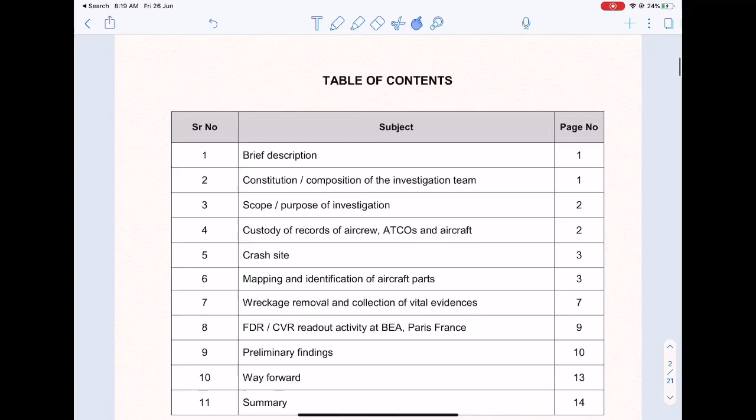What's up everyone, my name is Saurabh Kumar, and today we will be discussing the preliminary investigation report on the Pakistan International Airlines A320 registration AP-BLD air crash. This was a scheduled flight from Lahore International Airport to Karachi on the 22nd of May 2020. This report has been issued by the Pakistan Civil Aviation Authority, and we will be decoding it. I will not go over the entire report, but the key sections and preliminary findings are what we will be discussing.

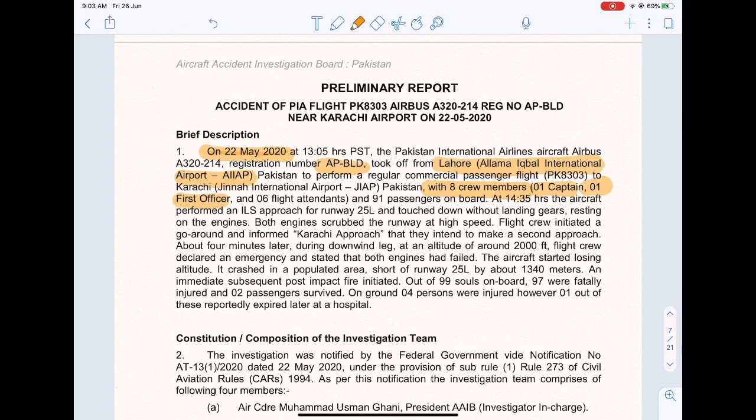This was on 22nd of May 2020, as highlighted here. The flight took off at 13:05 Pakistan Standard Time from Lahore Allama Iqbal International Airport. The registration was AP-BLD. This was a regular flight with 8 crew members on board, 1 captain and 1 first officer. Airbus A320 is a 2 crew cockpit, so you need a minimum of 2 pilots, the captain and the first officer, along with 6 flight attendants and 91 passengers on board.

At 14:35 local time, roughly 1.5 hours after takeoff, the aircraft performed an ILS approach. We will talk about what an ILS approach is later. The runway to land on was runway 25 left. Every runway is given a designator according to the magnetic orientation of the runway, so 25 basically defines 250 degrees from magnetic north. The aircraft touched down without the landing gears.

This is a very interesting part - why did this happen? So far no one has been able to ascertain this, but let's see. Was it because of a system design principle? Was it a malfunction? Was it completely because the pilots were disoriented? We will find this out as we learn and dig deeper into the report.

The plane rested on both the engines, which is evident from the pictures we have seen from the CCTV footage located at Karachi airport. Both the engines actually scrubbed the runway, and there is evidence of that.

Flight crew initiated a go around and informed Karachi approach that they intended to make a second approach, wanting to come back for a second landing. They declared an emergency and stated that both engines had failed, obviously because the engines had been so badly damaged upon being scraped on the runway that afterward there was no chance. There might have been fuel leakage, hydraulic supply failure, or electrical component failure - it was too difficult for the engines to perform at their normal operation.

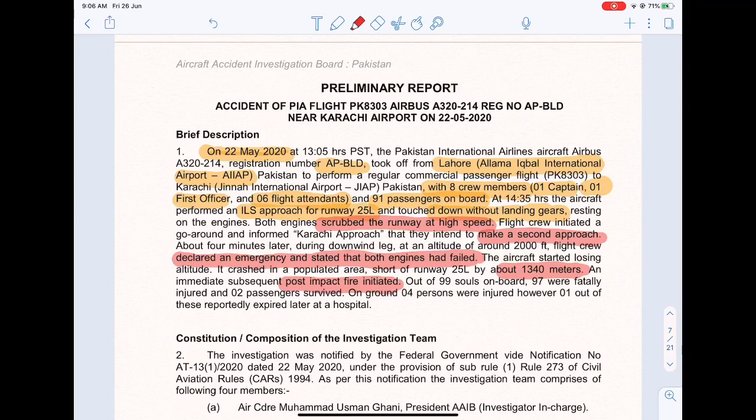Out of 99 souls on board, 97 were fatally injured and only 2 passengers survived. I believe one of the passengers was the chairperson of one of the leading banks in Pakistan. On ground, 4 persons were injured, however 1 out of these reportedly expired later at a hospital.

Alright, so it's unfortunate that this accident occurred. This was a completely avoidable accident. Every accident is avoidable, but accidents are inevitable. I think they will continue to happen, but we have to continue to learn from our mistakes.

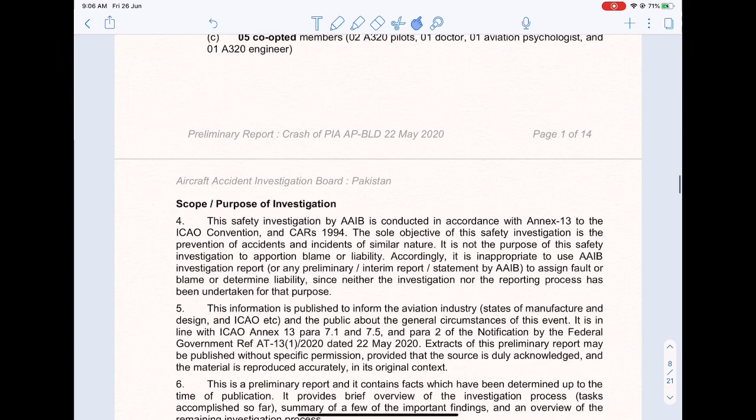This basically shows all the officers and leading investigators involved. I'm not going to delve deep into this, the scope and the purpose of the investigation. Largely it summarizes that the purpose of any investigation is basically to improve the safety of aviation rather than blaming or assigning blame to any particular individual or company.

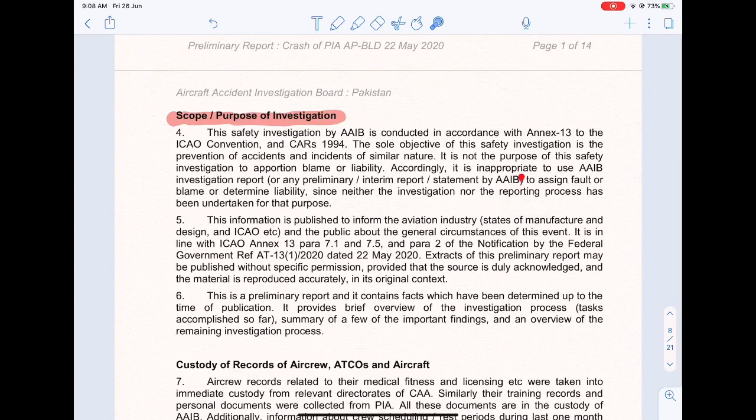Okay, so now let's move forward.

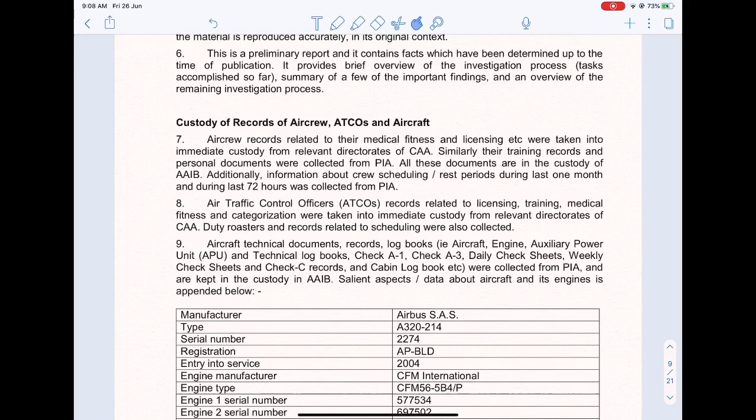Custody of records of aircrew, ATCOs and aircraft. So immediately after the accident, the investigative authorities will take hold of all the documents of the pilots, their schedule, in the past few hours before the flight or days. Were they fatigued? Did they sleep well? What was their rota like? How often had they been flying?

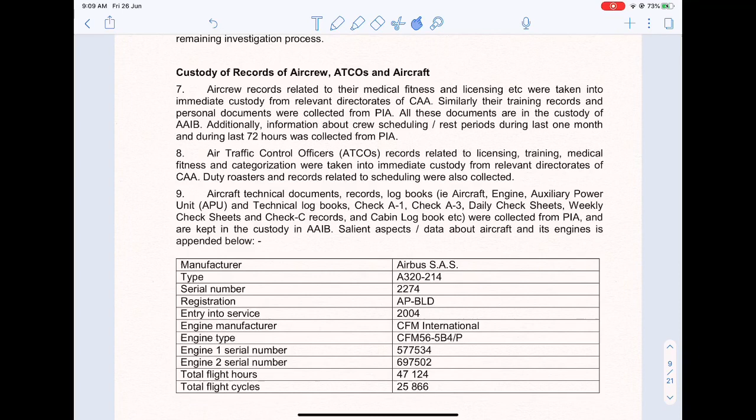They will check the maintenance records. When was the last maintenance done? When were the checks carried out? And interestingly, in this particular case, because the aircraft was grounded for a very long period of time because of COVID, since the Pakistani airspace was closed, even that aspect would be looked into, whether there was a degradation or whether the pilots were proficient enough to carry out their duties.

We call this being 'current.' Pilots have to do 3 takeoffs and 3 landings every 90 days. They have to do various simulator checks on a yearly or half-yearly basis. So even that aspect would be looked into.

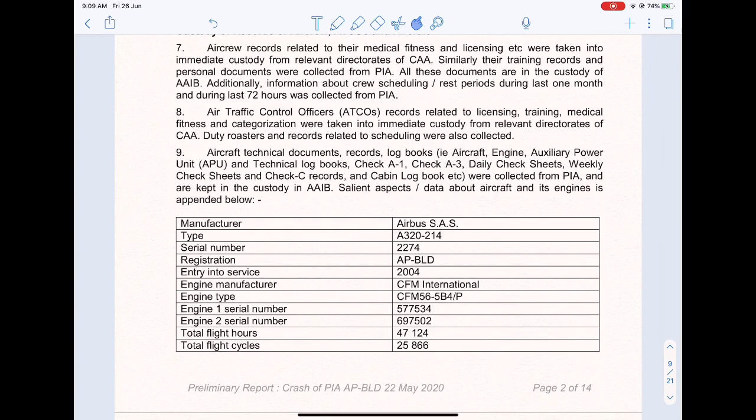This table summarizes the entire description of the airplane. The manufacturer was Airbus S.A.S., a European-based firm. The type of the aircraft, registration, entry into service 2004. So not a very old aircraft, it had been in service for about 16 years or so.

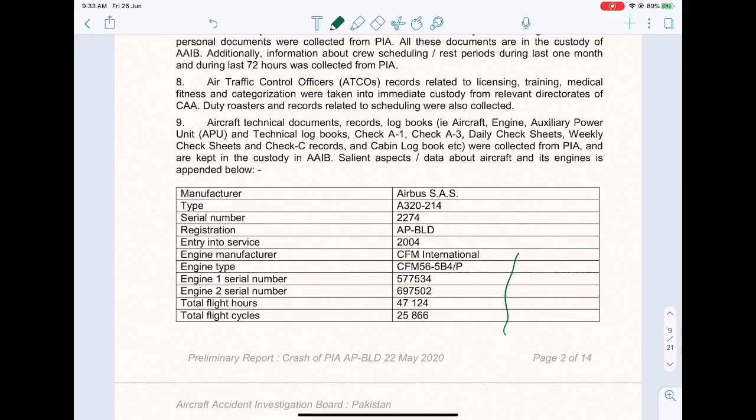Engine serial numbers and total flight hours and total flight cycles. So your flight cycles are your takeoffs and landings, and your flight hours are basically the total number of hours within which the aircraft was actually in operation.

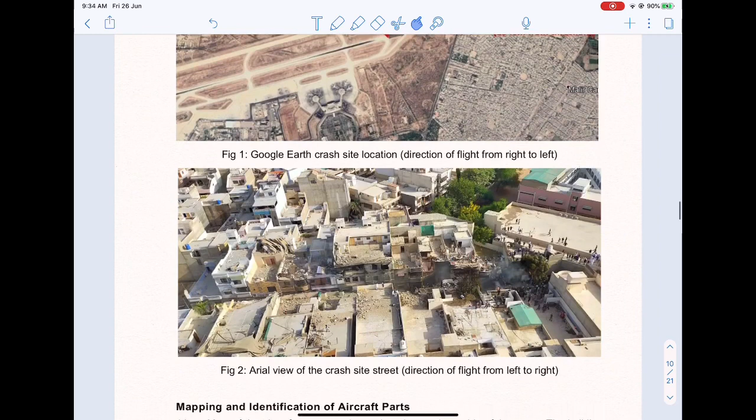Okay, if you can come further down, this is the aerial shot. So the aircraft came straight down here and it crashed in this particular alley over here. Straight, as you can see, there is no damage over here, no damage over here. However, it seems like the aircraft just came in and crashed over here.

I'm actually pretty surprised because the damage is very concentrated in just one alley over here. The destruction has largely been caused to the rooftops of the houses. No building has been completely demolished, and I think one reason for this is largely because the aircraft was coming at such a slow speed because it had stalled. It was just coming down. The speed was, I think, roughly close to about 140 knots or something, which is very close to your landing speed. And so fortunately, at least the damage on the ground was kept to a very minimum.

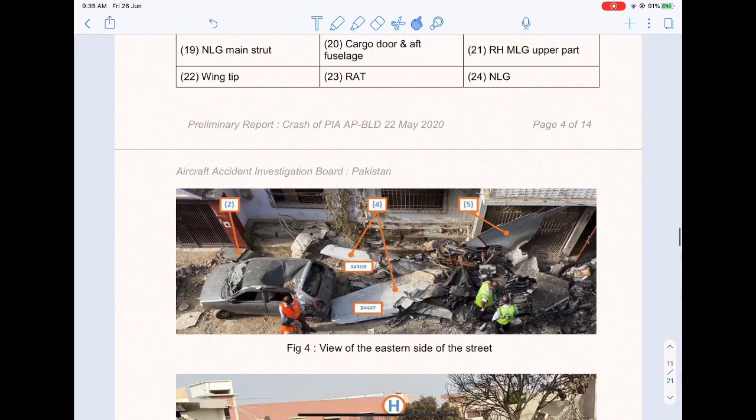For example, over here, I think this is the part of the wing or the stabilizer. This looks like the elevator, and you can see here all the damaged parts have been laid out on the ground.

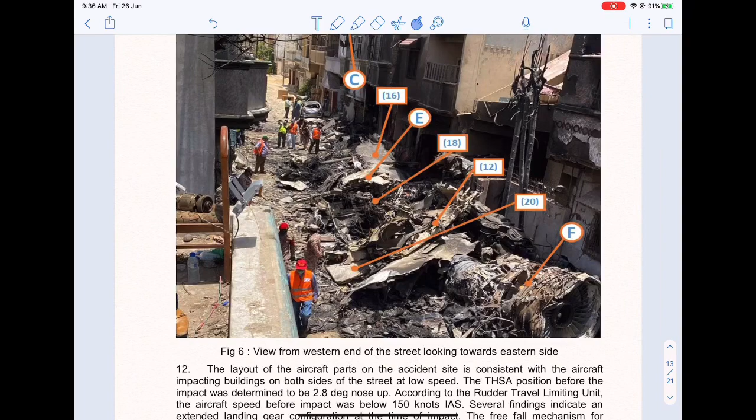So I think this whole structure over here is the fuselage component. I would like to assume this is the engine, could be the right or the left. Over here you have the gear assembly, located just behind the engines. And this seems to be the fuselage structure, the main body of the aircraft. Again, we can see how the entire structure fell in a single straight line, linearly within this alley over here.

And over here as well, we can see looks like one of the motors, probably from the engine, or it could be a part of the tail cone. It's very hard to say. It could be any one of the pumps for hydraulic lines or for the pneumatic air pressure.

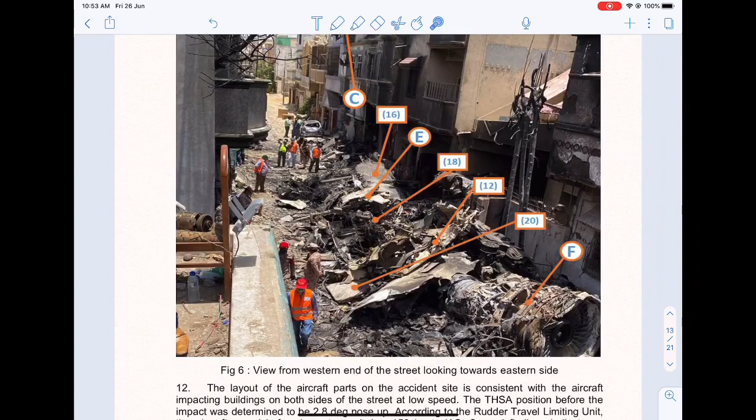So the manufacturer's responsibility is largely to identify these components, because they are the makers of these components, and bring all these components to another remote facility where they can be assembled and a skeleton structure can be prepared. We will see that now in the below pictures.

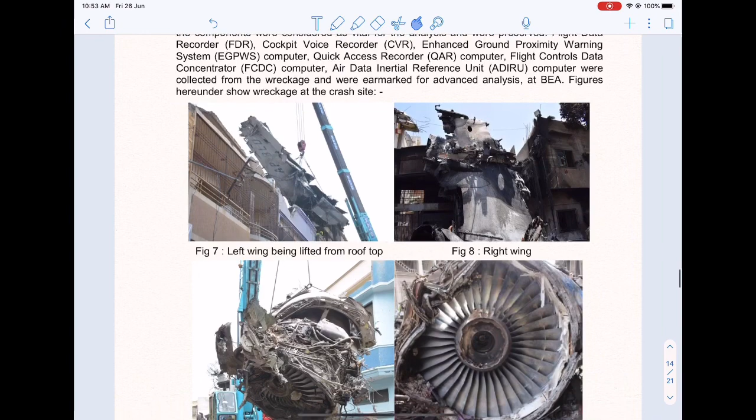So here you can see the scavenging effort. So this is the wing, I think this is the left hand side of the wing. Yes, this is the right hand side of the wing. Here we have the right engine, and this one is the left engine, which is more destroyed than the right one. So probably the left engine had the first impact upon the ground.

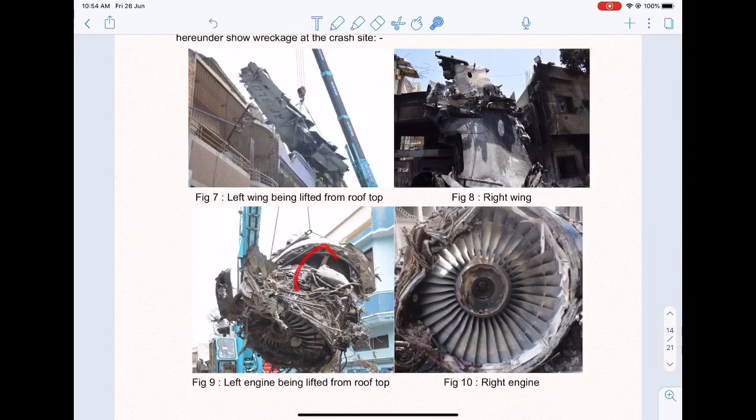This over here, I think this is the Full Authority Digital Engine Control, also called the FADEC. It's mounted on the side of the engine. This basically manages the entire operations of the engine. It's called Full Authority Digital Engine Control.

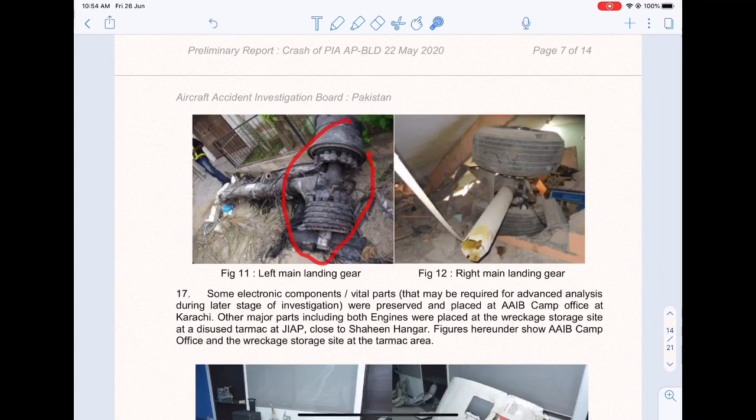Again, we have the bogie of the landing gear, the right as well as the left. Again, you can see the left is completely destroyed. The right is still intact with the tires, but the left one, the wheels, I think the rubber has completely melted or it has come off, but the right is still intact over here.

Some interesting components again we can see over here. This looks like the cowling of the engine. Again, by the curvature, seems like parts of the engine. Some extra components from the avionics, I believe, since I can see a lot of wires over here.

This panel seems to be from the cockpit. Yes, it is from the cockpit. Actually, this is the top-down view in this way. These seem to be the limitations, the SELCAL, this is the standby instrument, and this one is, I think, CPDLC, controller-pilot data link communications. Yes, so this should be actually upright in this way.

This seems to be the panel from the EGPWS, which is Enhanced Ground Proximity Warning System. This basically would have played a very important role because one of the modes or the warnings that it provides is about the landing gear. So if your landing gear is not down by 750 feet above the ground level and you're coming in for a landing, the warnings would chime.

It would state to the pilot, hey buddy, listen, your landing gears are not down, do something about it, you're getting close to the ground. So there are a lot of oral warnings, visual warnings which would have come, and we will hear this in the cockpit voice recording as well, why they ignored it, why the landing gears did not deploy, why they did not come out.

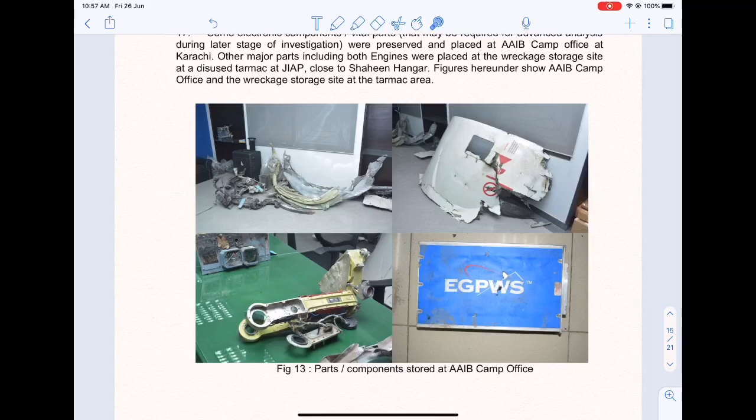Once the landing gear is extended, you can push your speed to 280 knots. But if you want to retract it inwards, the limitation is 220 knots. These are various limitations that pilots are supposed to know by memory, and this is again part of the FCOM.

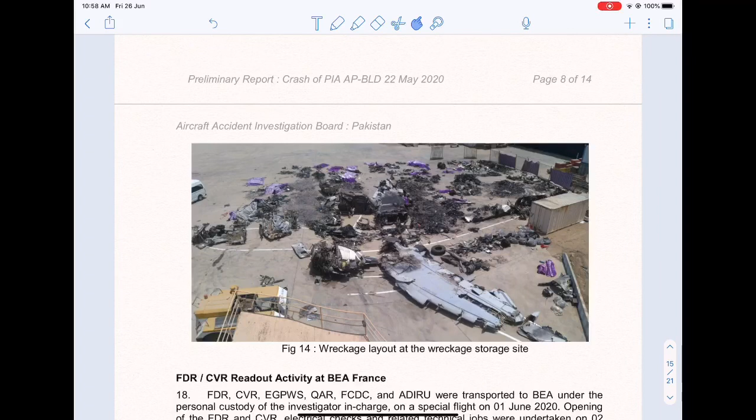As I was talking about, all the parts are scavenged from the crash site and laid out in this remote facility, which could be a hangar or open air facility, just to understand what components have been scavenged, what can be recoverable, and how we can retrieve information from various components. If you will see, this is the left wing. The right wing has not been recovered completely. These are your engine number 2, engine number 1.

This is the cockpit area, and that's the rear of the aircraft. So this is how the aircraft is actually laid out on the ground, and you can see these white markings on the ground, which basically show the dimensions of the Airbus A320. Sorry for that Mickey Mouse drawing.

Now, we all have heard about the ATC pilot communication, which is all over YouTube. However, we don't know what were the internal communications taking place between the pilots, or between them and the cabin crew, and the PA announcements. This would have recorded every voice, from their breathing to their communication with each other. That is essential, and that is what we have learned - that the pilots were actually talking about the coronavirus impact upon their lives and their financial situation, and they were completely distracted.

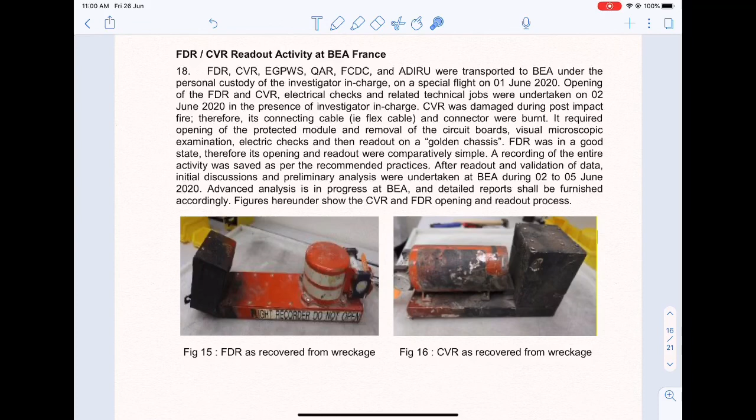The flight data recorder, on your left hand side, would have recorded every single parameter of the flight, as we will see in the next slide. So why the landing gear was not down, or when it was up, what was the flap position, what was the slat position - every parameter would have been recorded by the flight data recorder. This basically helps investigators simulate the environment in which the aircraft was flying at the time of the crash and moments before it.

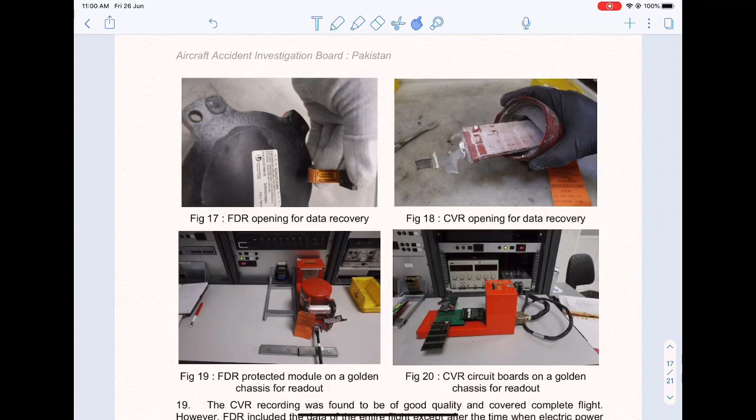Here we can see how they were basically retrieving the data from the flight data recorder and the CVR, and this is very sensitive information. You can see that no major damage was done - this is so robust and structurally integrated that it can basically take a large amount of forces, fire, and water pressure upon it before being completely destroyed.

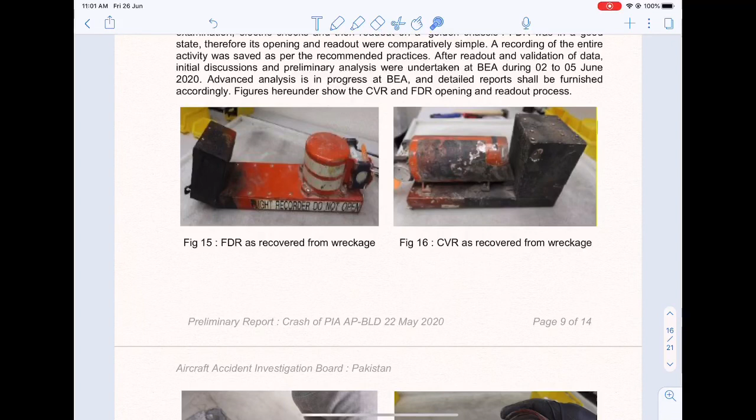Hardly has there been a case where the flight data recorder gets completely destroyed beyond which the information can be retrievable. It's called a black box, but however, you can see it's orange in color so that it is easily distinguishable at the time of retrieving the destroyed components.

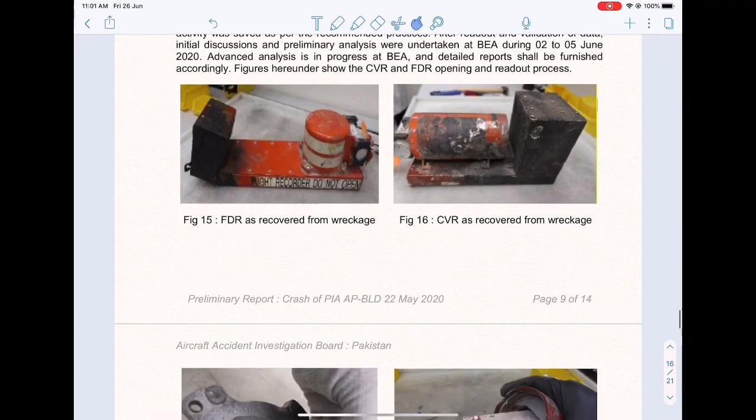So this is what essentially I want to talk about the most, the preliminary findings. We are going to go over each point, and I'm going to help you explain the various terminologies used, along with the actual approach chart for Karachi airport using the Lido charts, which is what pilots essentially use when they have to prepare for the approach briefing.

So let's go over it word by word. The investigation so far into the available evidences, that is the FDR and CVR readouts which we saw above, the preliminary assessment, footages from the CCTV and security cameras at the airport, Karachi approach radar data etc, following has been revealed and validated as the preliminary findings. These accounts are based on the recordings from the data, the CCTV footages, maybe eyewitnesses' accounts, and from the controller reports. The weather at the origin, en route, and at the destination airfields was fit to undertake the flight.

So we did not have any serious weather, so to speak. On the set date, the PIA flight took off from Lahore at 13:05, and the departure from Lahore and cruising flight was uneventful. However, there were no standard operating procedures followed, which is what we are aware of now as the aviation minister announced at the parliament. The crew also did not follow the standard call outs.

So what are these standard call outs? I will take you through. So we use particular phrases.

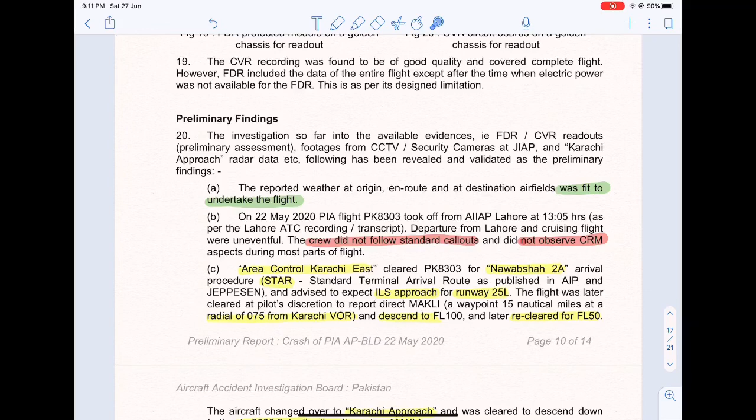And this point is located 15 nautical miles from radial, at radial 075 from Karachi VOR. Okay, so a few technical terms over here. I will have to explain all these. And descend to flight level 100 and later re-cleared for flight level 50.

The aircraft was handed over to Karachi approach. So from Karachi Control East, it went to Karachi approach and was cleared descent to further 3000 feet by the time it reaches Makli. So the workload was increasing continuously. First 10,000, then 5,000, then 3,000, and at their own discretion, which means that pilots had to reach 3000 by the point they were at Makli, and they had to do whatever they could do.

And this is where things happened incorrectly. Everything went haywire in this particular scenario because they came in too high. So let us go back to our drawing board and let's try to understand. But before that, let us open the Karachi chart again. So as I mentioned previously as well, this is basically the Nawabshah 2A arrival.

And they are essentially flying on this route. They're coming like this. Here is the point Makli, and this is the routing that they were supposed to follow. Make a right turn over here. There's another point called Poonam where they were not supposed to report. They were supposed to report at a point called Makli, which is this triangle over here.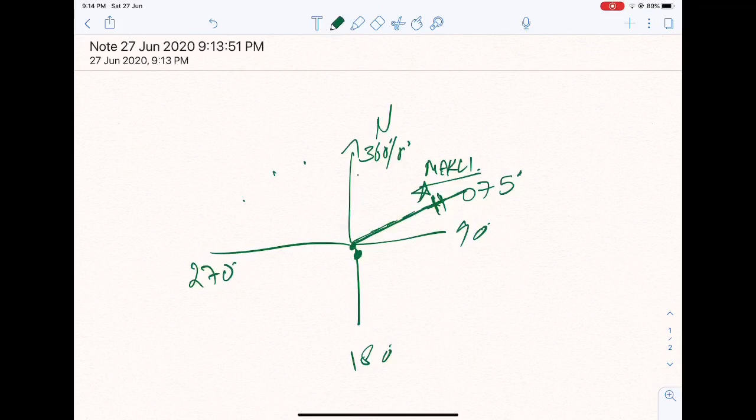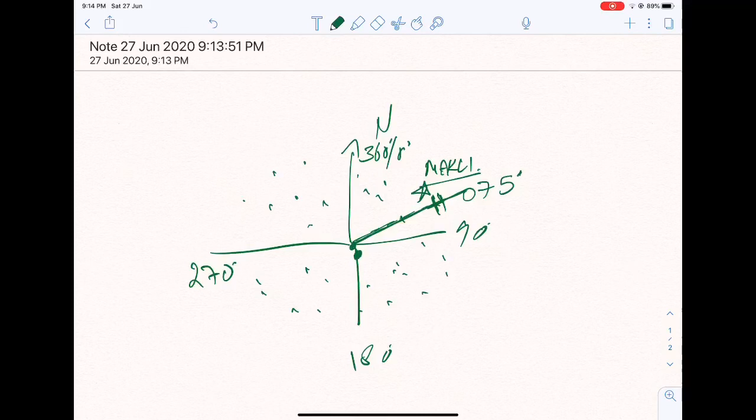And the aircraft would be on this particular radial 075, and the aircraft could be on any point. So it could be wherever it is coming from, but it has to be on a certain radial. Given the aircraft's position and where it was coming from, this was on radial 075, just to keep it simple to understand. So imagine this is like a clock, and we go 360 degrees from 0 to 360.

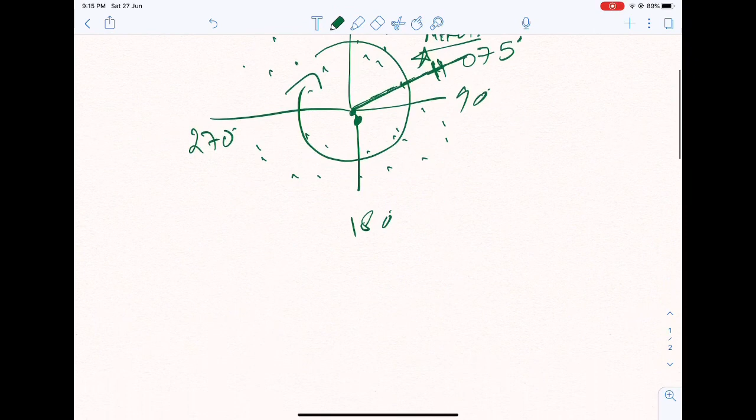Alright, since we are over here, I also want to take the time to explain what an ILS is. Okay, so imagine this is the runway. They said the runway is 25 left. What exactly is 25 left? L basically stands for left or right runway, so there were two runways at Karachi. The aircraft is coming from here - this is 25 right and 25 left. So this was using 25 left.

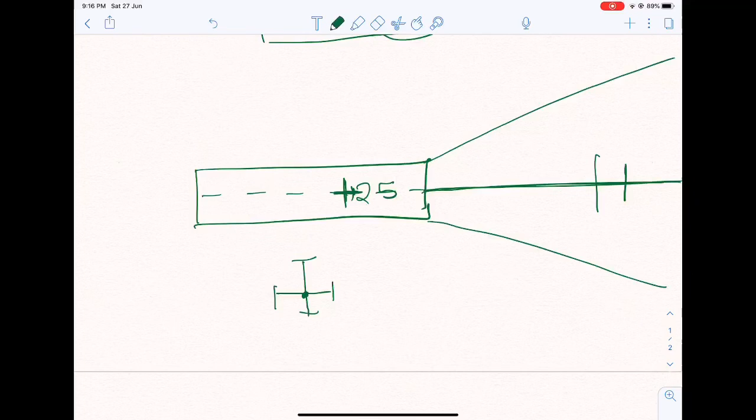Now what is an ILS? I'm not going to go very technical, but basically an ILS is an instrument landing system, and it centers the aircraft to the runway center line. You want the aircraft to land here, on the center line of the runway. There are two beams: one is for lateral guidance, which is your side to side guidance, and one is your vertical guidance. So you want to keep your aircraft exactly on the center. Imagine this is your lateral beam, the center beam. So if the aircraft is coming from here, it will track this particular path, which will be exactly on the center line of the runway.

That's one signal. Now let's look at it from the side point. Let's say this is the surface, where the aircraft will land. Now this is your vertical profile - and if I'm trying to make it a bit 3D, this will be your lateral profile, the center line of the runway. But here I'm concerned about the vertical profile. Sorry, that drawing is confusing - let's just keep this as the runway and this as your vertical profile. Usually this is at 3 degrees. The aircraft will follow this path vertically as it comes down. It can't be too high, because then the aircraft will land in the middle of the runway - it will eat up too much runway. It can't be low, because then it will land short of the runway. It has to be exactly on the glide path, so this we call the glide path.

So an ILS has got two signals. One is called a LOC, or localizer, and the second is called glide slope. The localizer is for your lateral guidance, and the glide slope is for your vertical guidance. You just need to know that for now.

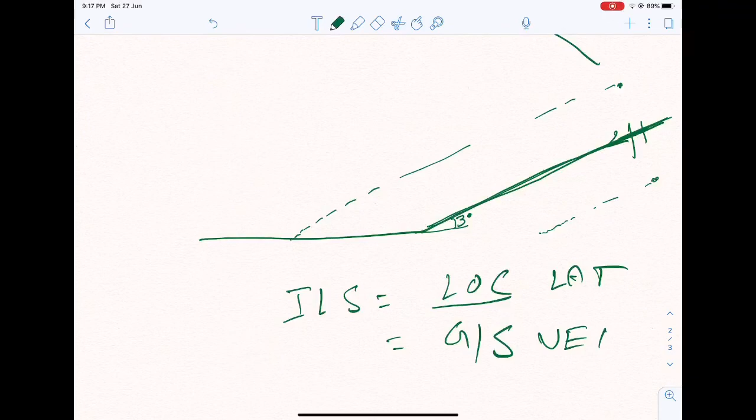Now if you go back to the Lido chart again - this is the STAR chart. It doesn't tell us about the glide slope; for that we have another chart. So if I open here, ILS chart 25 left, you can see this one here. The glide slope in Karachi was actually 3.03 - let me point it out to you. See this 3.03, it is slightly even higher than 3 degrees. That means it was a slightly steeper approach compared to a normal 3 degree glide slope.

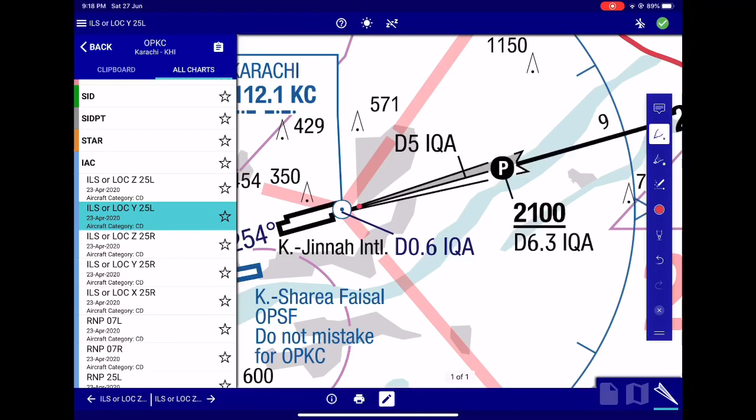Again here also we can see this is the point Makli. They were coming on the 075 radial of Karachi VOR, and this is the localizer you can see from here - this is the lateral guidance, and the center line is your lateral guidance, which will take you exactly onto runway 25 left at Karachi Jinnah International Airport.

For now, just follow the areas which I'm highlighting, because otherwise it will be very confusing, since the chart presents a lot of information. All I want you to look at right now is that this image over here - GP stands for glide path. It says localizer, so if you're coming for lateral guidance, then it is 3.03. Otherwise, for ILS, it is 3 degrees.

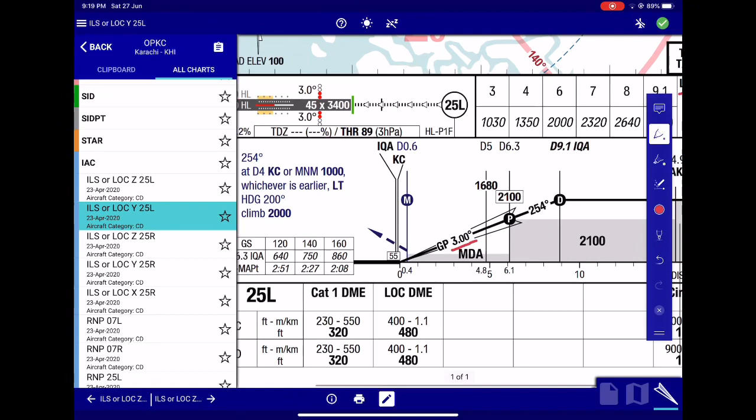Okay, so you can see here, this is your glide path. It will keep you exactly on 3 degrees, and it will allow you to land exactly at the touchdown, which is called the touchdown zone for the aircraft to land at.

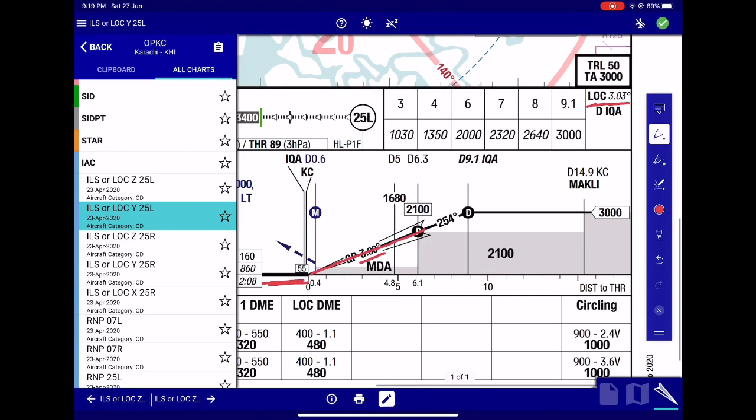And we were told earlier in the report that the controller asked the pilots to be at point Makli and 3000 feet. Remember, initially they told them to come down to 10,000 feet, then 5,000 feet, then 3,000 feet. This was actually supposed to be done. Now let us see what actually the pilots did, so we'll go back to our report.

So referring to paragraph D now, the aircraft ended up higher than the required descent profile. This is what we all know, that they were actually a lot higher than they were supposed to be at. At point Makli, the aircraft was at 9,780 feet, so let's say almost 10,000 feet. That means 7,000 feet higher than what they were supposed to be at. And they were at 245 knots, so they were not only high on the profile, they were also a lot faster. They shouldn't have been at this speed, they should have been at a lot lesser speed than this, and we will see exactly why this happened.

In order to manage the descent, the pilots realized they were coming in really high, and to lose the additional height, an open descent mode was selected via the FCU. Now this terminology is very specific to the Airbus aircraft, and I will explain this using a notepad. FCU stands for Flight Control Unit. This is a panel on the Airbus aircraft wherein you control the automated flight from, so all your automation controls are done from the FCU.

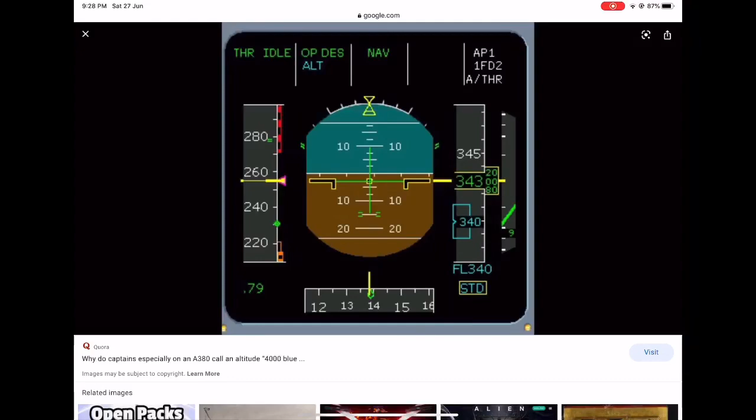Referring back to our original report, did we miss out on anything? I think we covered almost all the topics from there. So point number D, open descent is covered. FCU, yes, autopilots were disengaged and speed brakes were extended. Again, this was done because when you disconnect your autopilots, you can descend at a much faster rate. The Airbus has the system designed in such a way that with the autopilots engaged... but the question is, what are speed brakes?

What it does is it basically blocks the airflow. The airflow which is coming over the wings is generating lift. So by raising them, you're breaking that airflow and reducing your lift. They continue to extend upwards at a certain angle. The maximum deflection will only happen with the autopilots disengaged. If the autopilots are engaged, they do not deflect at a maximum angle, so you don't get the highest rate of descent.

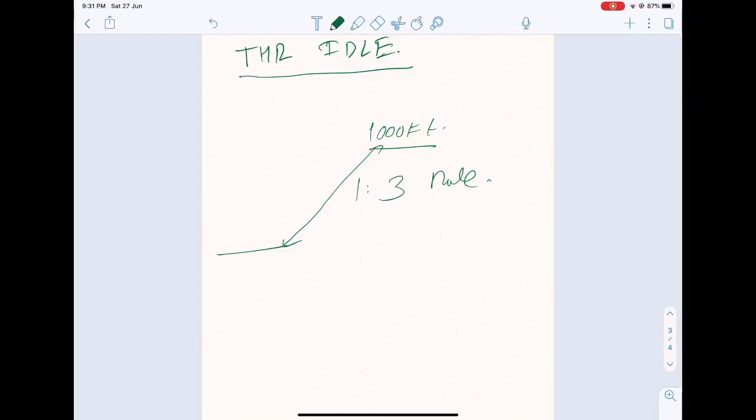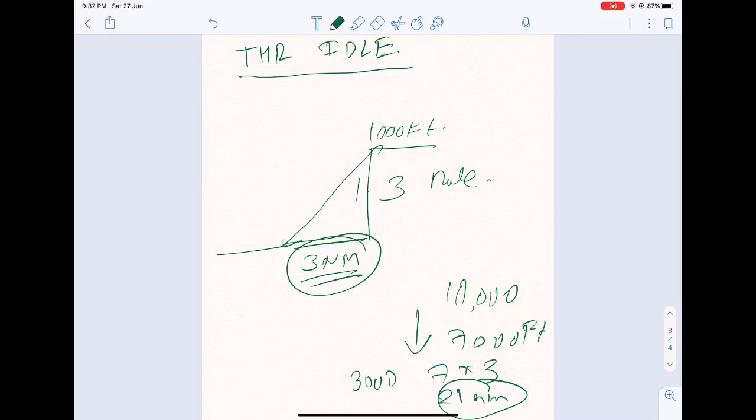So basically, if they are at 10,000 feet, and they had to come down to 3000 feet, which means they have to lose 7000 feet. So 7 times 3 is 21. 21 nautical miles was the minimum miles they required to descend down and come to 3000 feet. Remember, they were already 15 nautical miles out. The point Makli is at 15 nautical miles.

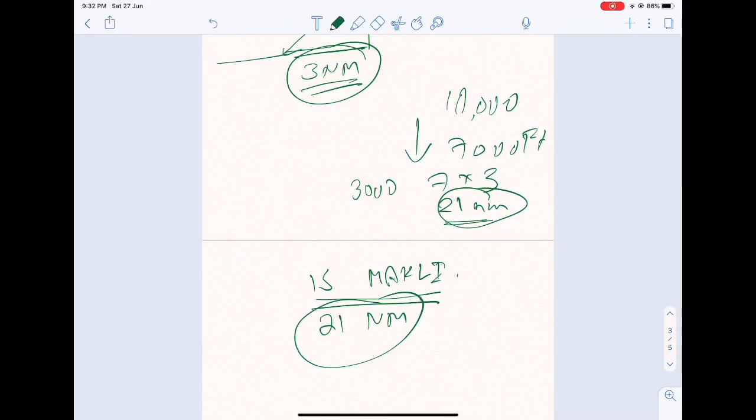And they require 21 nautical miles, which means they were never going to be able to make it down to the runway, given the height and speed they were at. Now 21 nautical miles is the minimum required, but there are certain factors we need to consider, like speed. They were at 250 knots and landing speed is close to 140 knots, so they had to reduce almost 100 knots, which needed about 10 more nautical miles. So 21 plus 10 equals 31 nautical miles.

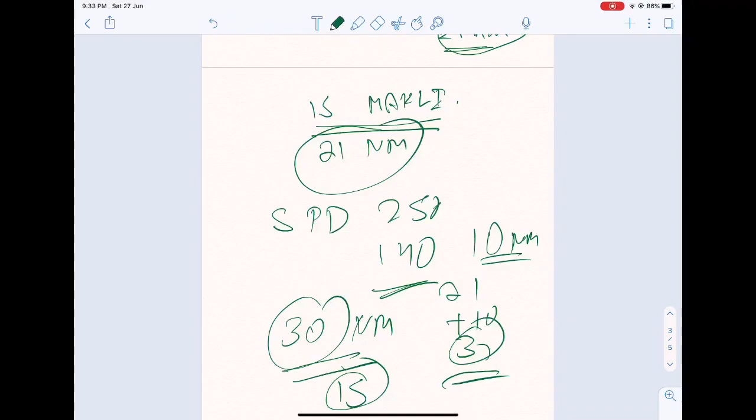We don't know about the headwind or tailwind. If there was tailwind, we would add 10% of the tailwind component; if headwind, we would reduce. So minimum, let's say they needed 30 nautical miles from Point Makli, and they only had 15 remaining, meaning they needed twice the track miles. No confirmation was given by the pilots as to how many track miles were required, because they said 'we are comfortable with the approach, sir, we will make it.' That showed they were overconfident.

They had developed this notion that we are going to land, come what may, whereas the controller was actually giving them a suggestion. He told them, please take an orbit, you cannot come down on the ground with so much height, you will be coming in really fast. This was basically where the accident was brewing. It had already started. The ingredients were laid out so the aircraft could be adjusted to the required descent profile, but no orbit was executed and the effort to intercept the glide slope and localizer was continued.

The pilots decided that they were going to go and shoot this approach. When you say intercept, that means you have to intercept the two signals, the vertical profile and the localizer, so that you're coming on the center line of the runway and on exactly the right profile.

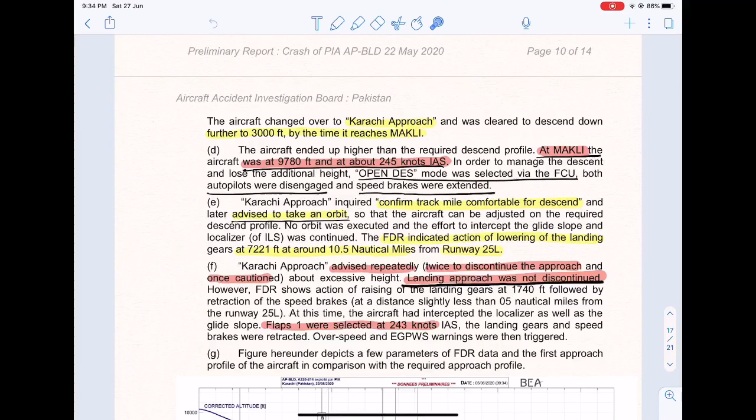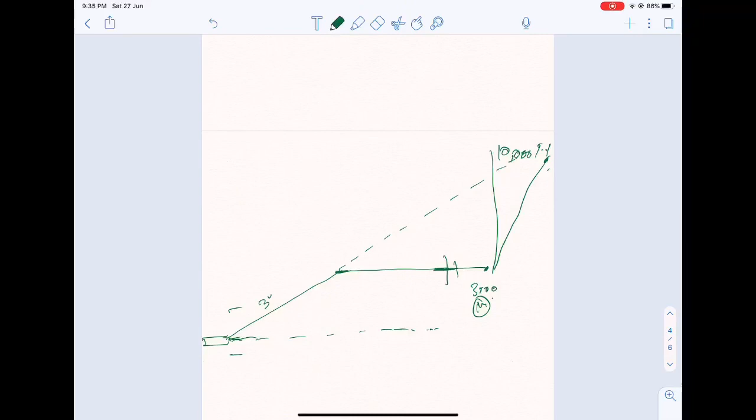At 3000 feet, I will intercept the signal, which is my 3-degree signal, and the signal will continue, and then I will intercept my lateral signal as well, just to keep me on the center line of the runway. You always establish the localizer signal first, so first the aircraft will come on the center line. Once it reaches this particular point, we'll go back to the chart.

This was I think 6 or 5 nautical miles, where you will intercept the glide slope. From here on, the aircraft will descend continuously until it touches down. Here the pilot intercepted the glide slope from above, not from here, but from above.

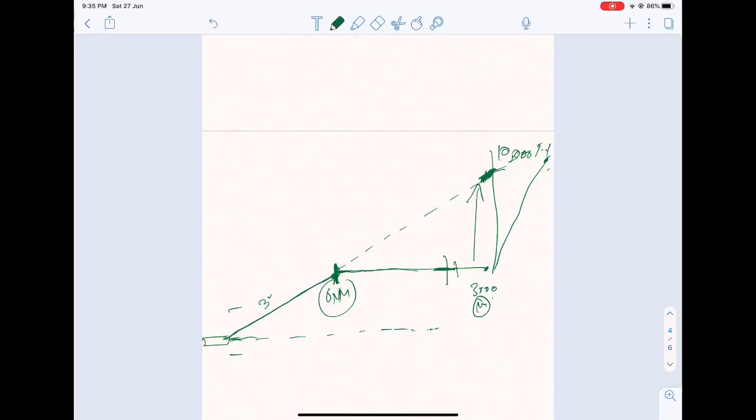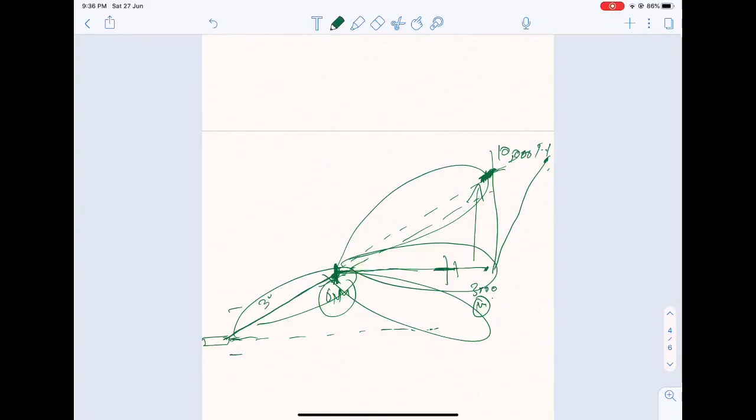Now there's a risk that it could have been a false beam, because there's a limitation of the ILS system. There are certain false beams generated as well. So let's say this is one beam, this is one beam, this could be another beam, and false beams are generated above as well as below the actual profile. I'm not going to get too technical, but I'm saying there's a high probability they actually intercepted the wrong vertical beam, not the actual beam they were trying to intercept. But anyway, they continued with their approach.

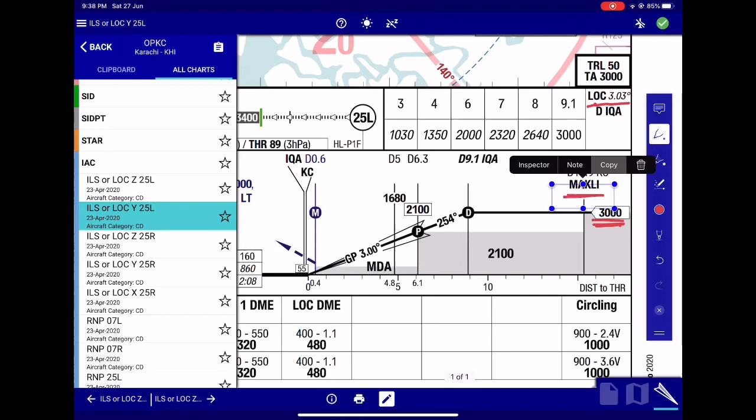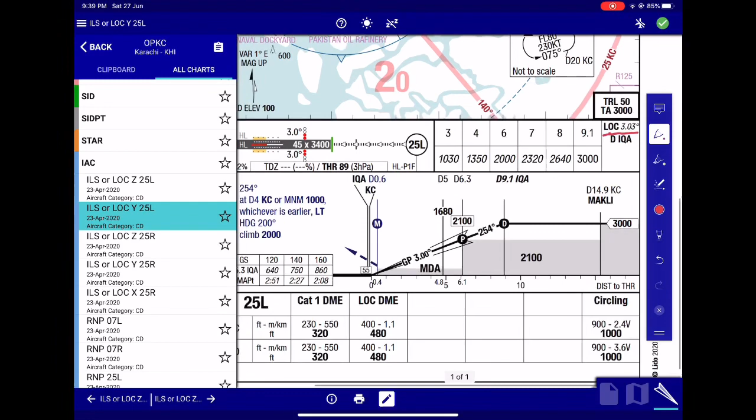Now we need to look at the Lido chart. This is very important for us because this will help us to understand exactly what went wrong in the final phase of the first approach. Let me explain this. This is the vertical profile, and this is the top-down profile. This one and this one show exactly the same information, but in different layouts.

So let's say 7,200 is when they lower the landing gear. Let me pull out my highlighter. Let me extend this glide beam somewhere. This is your extension of 3 degrees. Remember, as you go higher and higher, there's a false beam. It may not be the true glide slope beam which will take you exactly onto the center line at the right touchdown zone of the runway.

But anyways, at 7,200 feet, sorry, let me just go back, and at 10.5 nautical miles. You see this here, this is 9.1 nautical, so somewhere over here, let's say 10.5. Okay, this is 10, 1, 2, 3, 4, 5, 10.5.

So let's say here 10.5, somewhere over here they lowered the landing gear, because they wanted to reduce the height. While they were supposed to be at 3,000, they were still at 7,200. Again, how much they had to lose? They had to lose close to 4,200. How much did they require for that? So 4 times 3 is 12. So minimum 12 nautical miles is what they required.

And how much did they have in order to intercept the glide slope? Only about 1 nautical mile left. They were definitely coming too high. All the indications were there. The aircraft was telling them, the controller was telling them. They knew it. They decided to continue the approach.

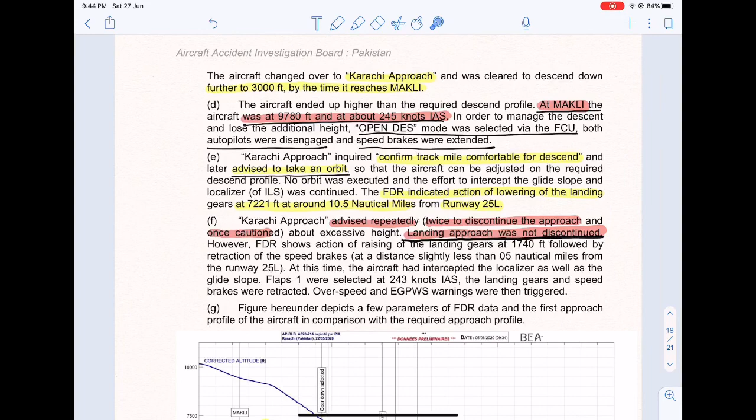So it's counterintuitive. And overspeed and EGPWS warnings were then triggered. Overspeed, definitely, because they were overspeeding. They exceeded the 230 knots limit for flap 1. EGPWS, because they were coming in at such a fast rate that it's like terrain. Their vertical speed was, I think, in excess of 2000 feet per minute, which told the aircraft systems that you're coming in at a much faster rate, so slow down.

Okay, so referring to paragraph G, which is the figure here under, it basically shows the comparison between the actual profile of the aircraft and what the profile which was required, which should have been followed. And we can see that on the right as well, the depicted chart, whereby we can see what exactly should have been flown. So if you notice here at Point MAKLI, which is a 3000 point, and if you can refer to the chart here on the right as well, that at MAKLI here, right, you should have been at 3,000 feet and above. So this 3,000 feet and above is a restriction that by the time you reach MAKLI, you should be 3,000 feet and above. And interestingly, there was a hold as well. Now, what is a hold?

Hold is a racetrack pattern wherein pilots can continue to hold in it until they have further clearance, or let's say they want to descend while they are in the hold, or if there is traffic and the ATC cannot give you the landing permission. That is why the ATC continued to assist. A hold is available, which was at Point MAKLI, which is the officially published hold. Here also you can see at MAKLI, the pilots could have held and they could have bought some time while they could have reduced their altitude enough so that they could come down to 3,000 feet. Now, they did not use that. They had complete information, they had all the resources available, and they did not do that.

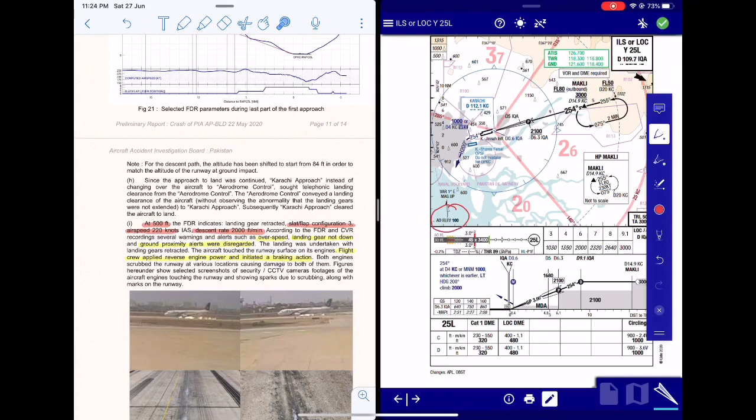Both the engines scrubbed the runway and were damaged at various locations. Figures here under show the screenshots. Basically we can see the sparks which are being generated from the engines because of the friction, and this scrubbing basically led to the failure of the engines. The engines were completely in good condition. However, because of the physical damage that was sustained by the engines when it went for a go around, it lost power on both the engines.

So paragraph J, the aerodrome control observed the scrubbing of the engines with the runway but did not convey this abnormality to the aircraft. The air controller should have informed that you have carried out a belly landing, but there was no recording or any mention of this information from the controller to the pilot. It was conveyed to the Karachi approach on telephone rather. So the controller rather informed the approach.

After the go around was made, the ATC communication shifted once again from the tower controller to the approach controller. And the approach controller was informed by the tower controller that the Airbus A320 PIA 8303 had made a belly landing, but not to the pilots. Now that is again a little surprising, that the ATC should have informed or should have given him the warning that you have actually carried out a belly landing and your landing gear was not extended. The warning should have come out even before the aircraft touched down on the runway.

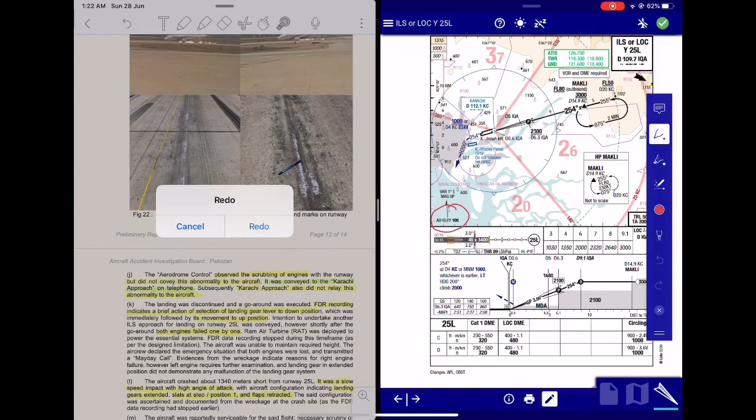Subsequently, Karachi approach also did not relay this information about the abnormality of the aircraft. In fact, we can hear in the cockpit voice recording that the controller confirmed, are you carrying out a belly landing? Now that was not required, because the controller should have been informed of any given emergency. The controller could have asked, are you declaring a mayday? Do you have a problem with your landing gear? But rather, he confirmed, are you carrying out a belly landing? Probably because this was the information which was passed over by the tower controller to the approach controller.

Moving to point K, the landing was discontinued and a go around was executed. The recording indicates a brief selection of the landing gear lever to the down position. So, probably this might have happened while the aircraft was scrubbing on the runway, which was immediately followed by its movement to the up position. And then, probably, the pilots realized, or in haste, they just put it back up straight away. Intention to undertake another ILS approach for landing on runway 25 left was conveyed because they had to come back for landing.

However, shortly after the go around, both engines failed one by one because of the damage sustained while they were being scraped on the runway.

Ram air turbine was deployed to power the essential systems. Now, ram air turbine is a small fan which is deployed from the belly of the airplane. Once you lose your generator capabilities from both engines, you have either the auxiliary power unit located in the tail cone of the airplane, or, if that is not working, the ram air turbine will automatically deploy, giving you just the bare minimum electrical needs for the cockpit display systems and other electricals to work. The aircraft was unable to maintain the required height.

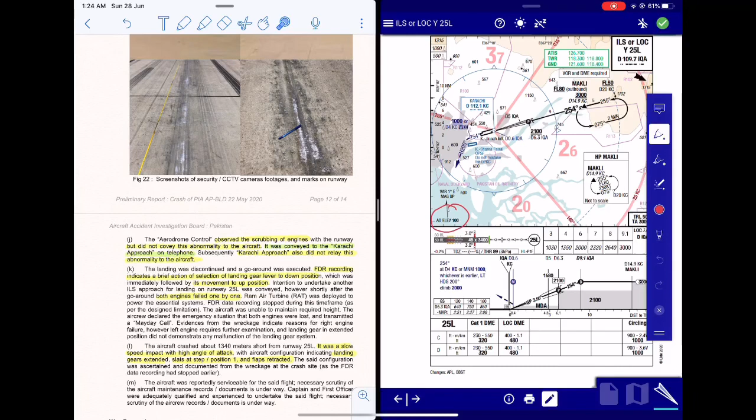Landing gear in extended position did not demonstrate any malfunction of the landing gear system. When they were coming in for the second approach, the landing gear was extended down, and it did not signify that there was any fault in the landing gear system.

The aircraft was reportedly serviceable for the said flight. Necessary scrutiny of the aircraft maintenance records documents is underway. Captain and first officer were adequately qualified and experienced to undertake the said flight. Necessary scrutiny of the aircrew records documents is underway.

So we need to check basically whether the licenses of the aircrew were valid, whether they were proficient and current enough. Now, following the release of this report, it has also been found that there are a lot of fake license holders in Pakistan.

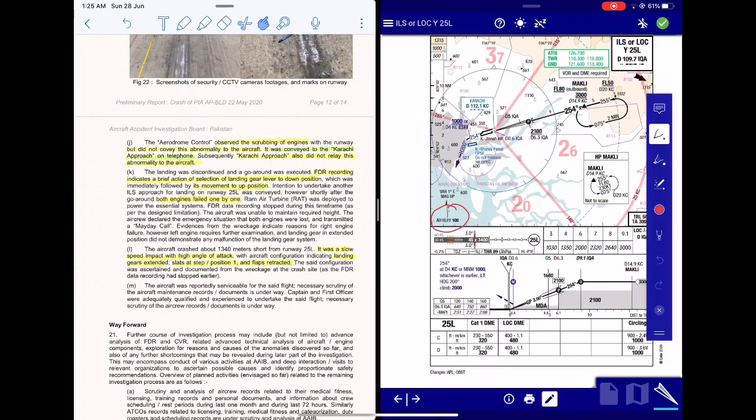And almost about one third of the pilots have been suspended on suspicion that they are carrying illegal documents. This is a huge eye opener for the aviation industry, especially in Pakistan, whereby it is being understood that a lot of pilots got their exams cleared when somebody else actually sat for their exams, and they are not even technically qualified to undertake flight operations while they are actually being employed as pilots in Pakistan.

The rest of the report basically summarizes the entire report once again and the future course of action which will be taken. This is a preliminary report and not a complete exhaustive report, but it does give us a fair idea about what led to this accident.

What we need to understand is this, that every accident is caused by a chain of events, and the accident in this case occurred not just because the landing gear was not extended, but due to several factors such as: they did not follow the SOPs, there was no crew coordination, and the crew resource management principles were not followed. They did not support each other, and one did not become assertive if the other one was making a mistake.

If the captain was trying to take control of the airplane when he was doing it incorrectly, the first officer could have actually prompted the captain or could have taken the controls if he determined that the aircraft was not in a safe condition. But there was no such assertion made on behalf of the first officer.

It's very unfortunate that this accident took place, because this was a very avoidable accident. But it's not time to blame or shame anyone, but rather to learn certain key elements of the human factors and ensure that such a tragedy, which was totally avoidable, is never repeated again in the future.